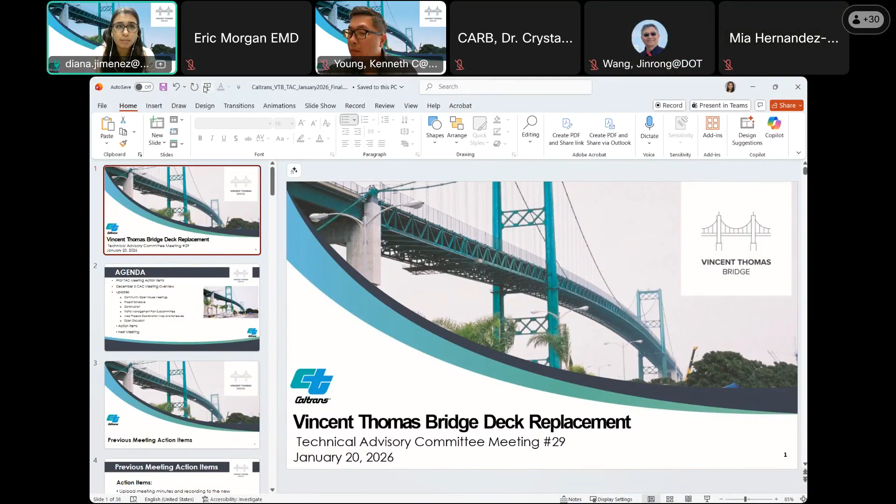There we go. Okay, so again, thank you so much for joining us on our 29th Technical Advisory Committee meeting for the Vincent Thomas Bridge Deck Replacement Project.

For today's agenda, we'll be going over the prior TAC meeting action items, the December 3rd CAC meeting overview. For the presentation, we'll talk about our community open house meetings that were postponed, project schedule, construction, our traffic management plan subcommittee, our area projects coordination map and schedules, and open discussion.

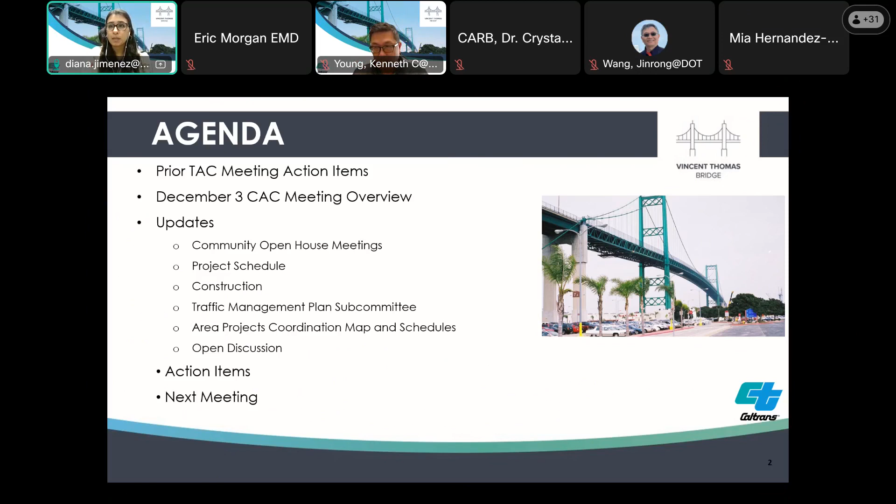So for the previous meeting action items, we uploaded our meeting minutes, written recording, and presentation to our Vincent Thomas Bridge project website, so that's available to view now.

For the prior CAC meeting, we had it on December 3rd, where we went over the CAC meeting action items from the previous CAC meeting, the November 18th TAC meeting overview. For presentation items, we discussed some upcoming closures of the Vincent Thomas Bridge, the project schedule, a recap of the October 29th Goods Movement stakeholder meeting, our project coordination map, and we discussed the location of an upcoming Vincent Thomas Bridge construction field office.

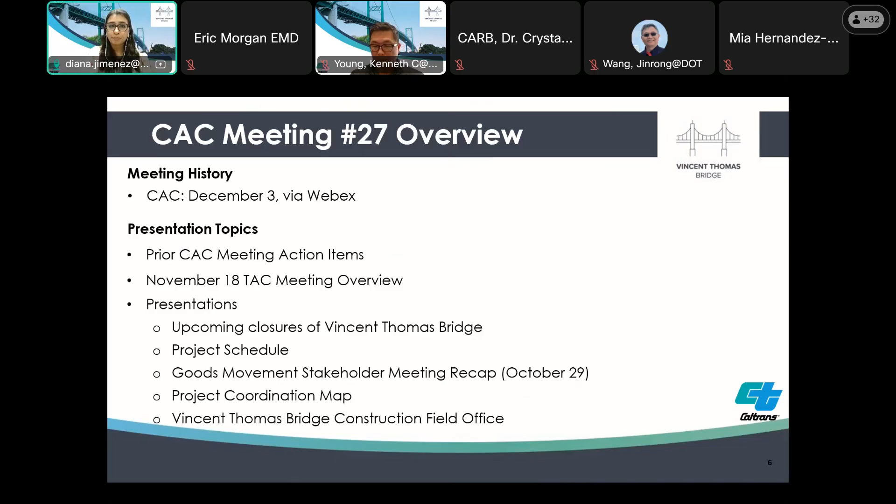And so for our first item, I know originally we had sent out a press release regarding some community open houses, 3 to be specific.

If you haven't seen our most recent press release, we had to postpone those meetings and are currently working on finalizing the new dates. Once that's ready, we'll send out another press release and post our social media updates, so stay tuned. We still plan on having one in Wilmington, San Pedro, and a virtual one, and we're coordinating with different community groups to make sure the meetings do not overlap. Thank you for your patience with that.

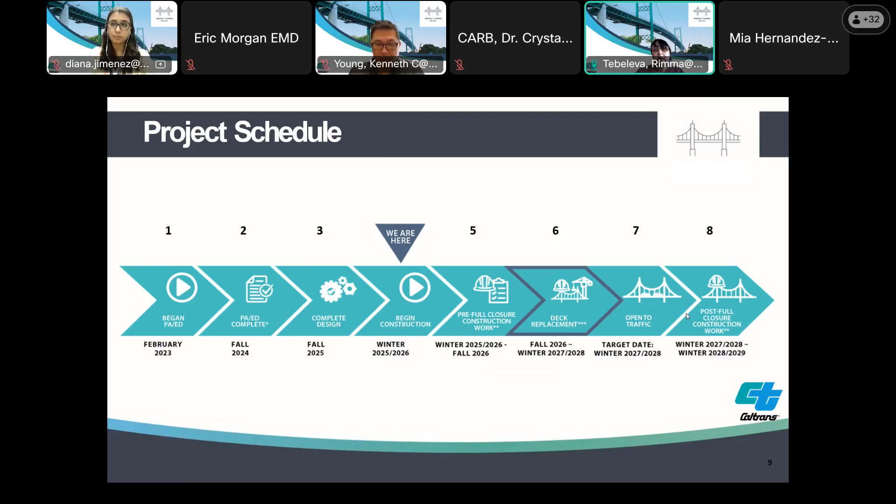All right, thank you, Rimma. This is Andy Chen from Structural Construction Caltrans. Before I start, can everybody hear me fine? Thumbs up if you can hear me.

All right, thank you. For the next few slides, I'm going to talk about what we're going to do during construction, such as how many stages, means and methods, and concept. There will be 3 stages during construction: the first is the pre-full closure stage, the second is the full closure stage, and the third is the post-full closure stage.

For the pre-full closure stage, it will start from spring 2026 to fall 2026, as the slide shows. We actually started now, and it will have overnight one-directional closures beginning in spring 2026. We haven't started yet—most likely we'll start in March this year. The closures will be Monday to Friday, only one direction per night.

For the westbound, we will close the bridge at 10:45 p.m. and open at 6:45 a.m. For the eastbound, it will be closed at 10:15 p.m. to 6:45 a.m. Of course we'll work during the daytime, but daytime work does not require closure, so during the pre-full closure we only have night closures, and potentially weekend closures as well.

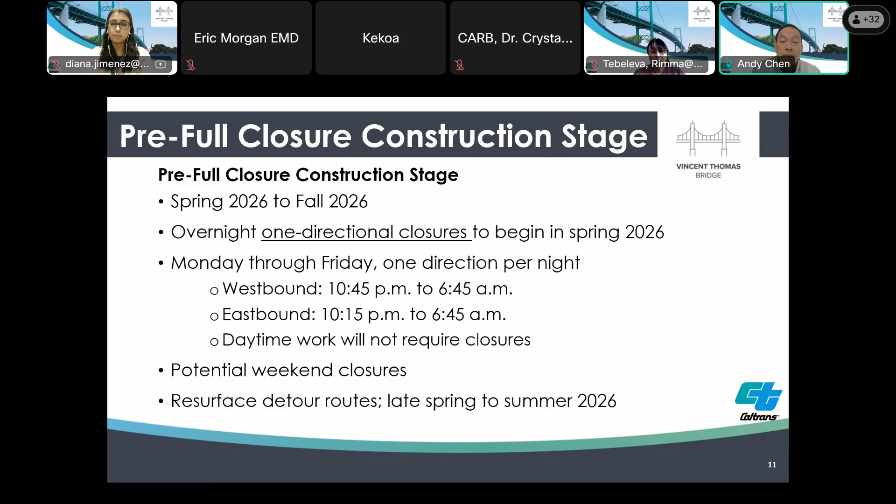And of course, during this period, we will resurface the detour route during late spring to summer 2026. All right, next slide please.

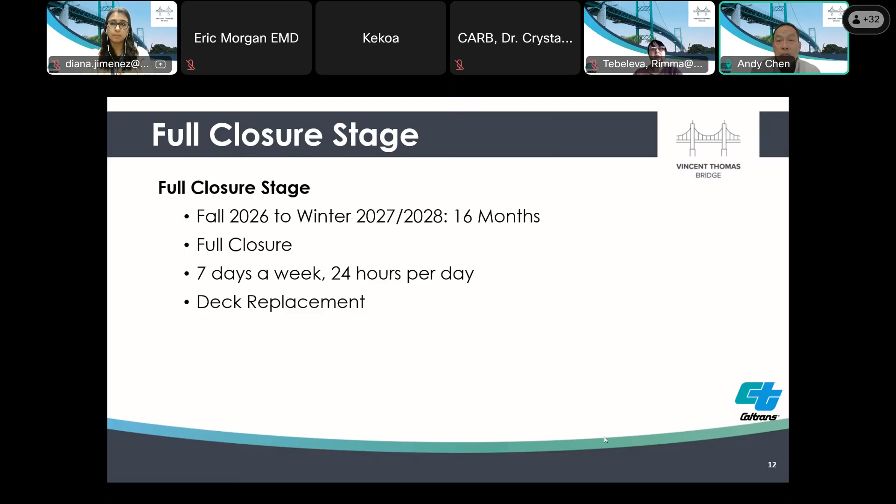This is the second stage of construction, the full closure stage. It will start from fall 2026 to winter 2027-2028, lasting 16 months. It will be a full closure, meaning the bridge will be completely closed day and night, and we will work 7 days a week, 24 hours a day. This is the stage where we actually start doing the deck replacement, removing the deck and replacing it with a new precast panel deck. Next slide please.

The last stage will be the post-full closure stage. It will start from winter 2027-2028, right after the full closure, to winter 2028-2029, taking about 12 months. During this stage, we will be doing some minor work such as utilities and punch list items.

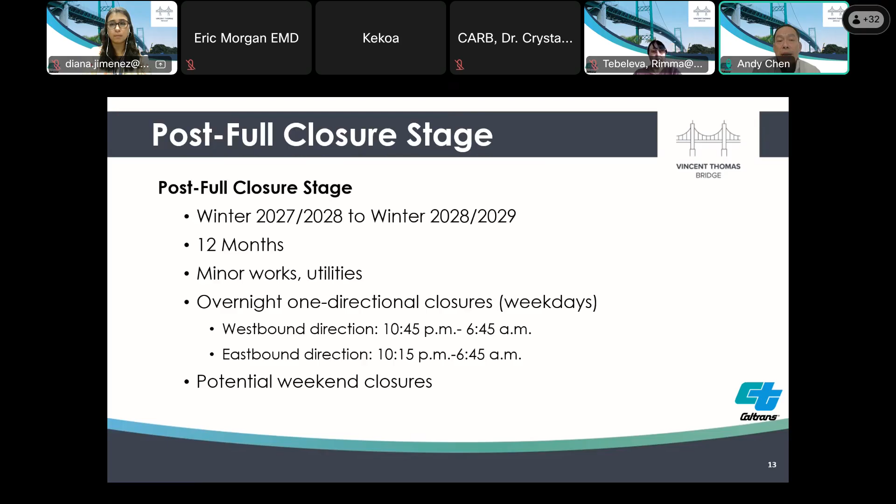During this stage, we will also need an overnight, one-directional closure every weekday, with the same closure times: westbound 10:45 p.m. to 6:45 a.m., and eastbound 10:15 p.m. to 6:45 a.m. There will also be potential weekend closures, but during this stage all the work is very minor and shouldn't have much impact. Next slide please.

So that was the 3 stages. Now we're going to talk about what we're going to do during those stages. For the pre-full closure construction, this will be preparation work—we're not just going to go on the bridge and start breaking the deck. A lot of preparation work needs to be done. For example, we're going to install temporary elevators, 2 of them, and stair towers, 2 of them, at the bridge. Those are for access, since a lot of construction has 4 crews working at the same time.

Second, we're going to install the temporary protective cover, or protective shielding. The main purpose is to protect the local residents and also businesses underneath the bridge during construction. We're also going to install the temporary access platform, which allows the worker to have immediate access underneath the bridge to do their work. And we're going to install temporary bracing on the approaches and also suspension spans to ensure the stability of the bridge during construction. And of course, during this stage, we're going to resurface the detour routes.

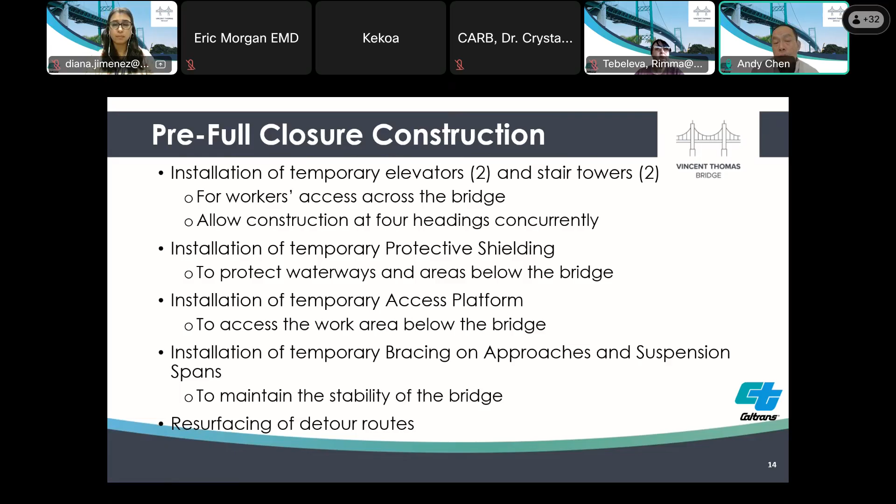Here's a picture of the temporary elevator that I mentioned earlier. This one was installed in 2011, and this time we're going to install the same one, two of them. They will be at bent 9 and bent 14 on each side of the Main Channel. These elevators are very essential for the work because they not only provide access to the bridge, but also give us space on the bridge. We all know the Vincent Thomas Bridge is a very narrow bridge, so we need all the space we can get. With those elevators, the workers can park their truck on the ground level and use the elevator to the deck, freeing up a lot of space for the work and making it much more efficient.

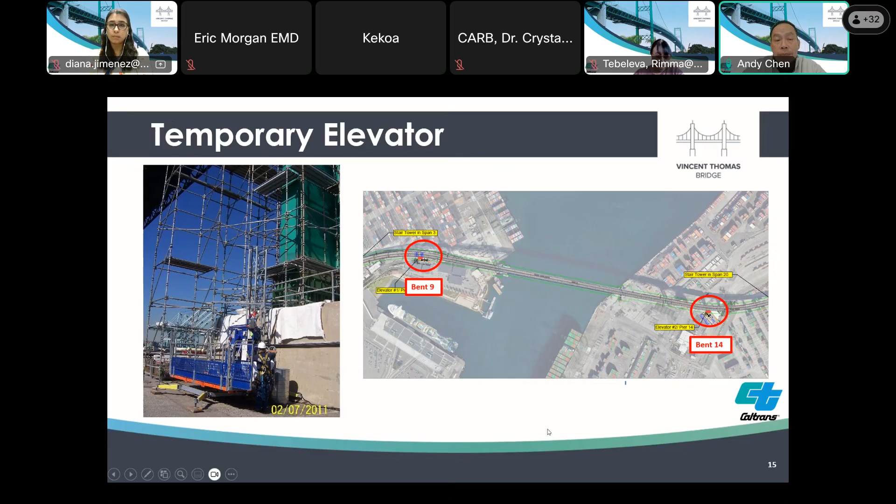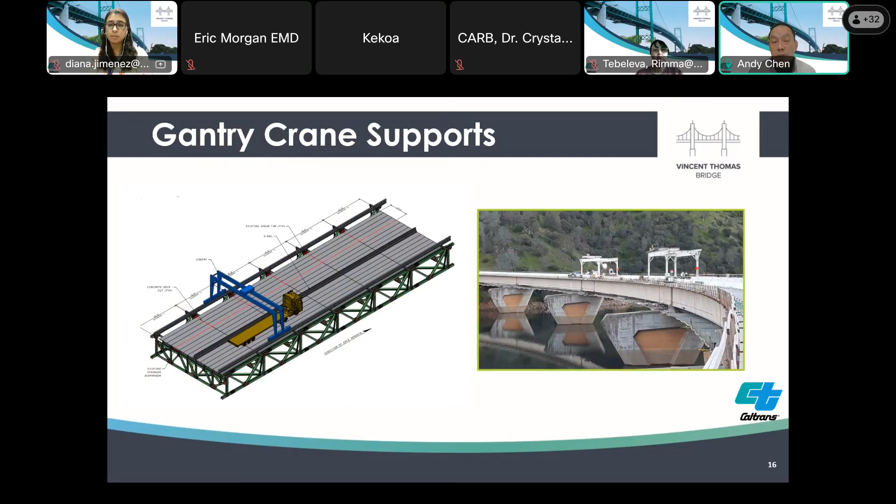Another way to maximize the space on the deck is to utilize the gantry crane. As we all know, the conventional crane is going to take up a lot of space, but as you can see on the right-hand side of the presentation, that's an example of the gantry crane. With the gantry crane, we can also free up a lot of space on the deck to ensure much more efficient work during construction.

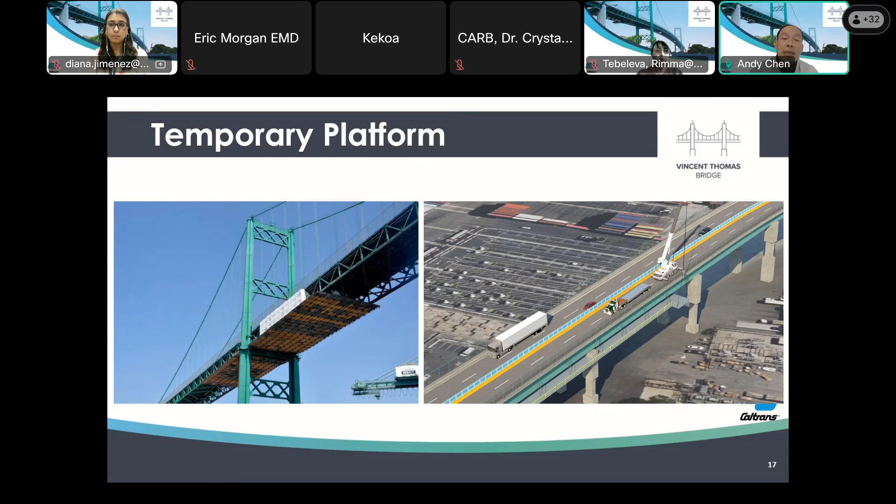Here's a picture of the temporary platform I was talking about earlier. It's a QuikDeck, and this time we're going to use the same system for the bridge, but this time we're going to cover the entire bridge with those decks. The concept is that during the pre-closure stage and during night closures, the contractor is going to assemble those platforms on top of the bridge deck. Once they reach a certain amount, we will lower the platform with the crane and hang them underneath the bridge. So this time we're going to use the same exact system as shown in the picture here.

Here's the temporary bracing I was talking about earlier. We are going to have temporary bracing on every bent to ensure the stability of the bridge during the demolition and also the deck replacement.

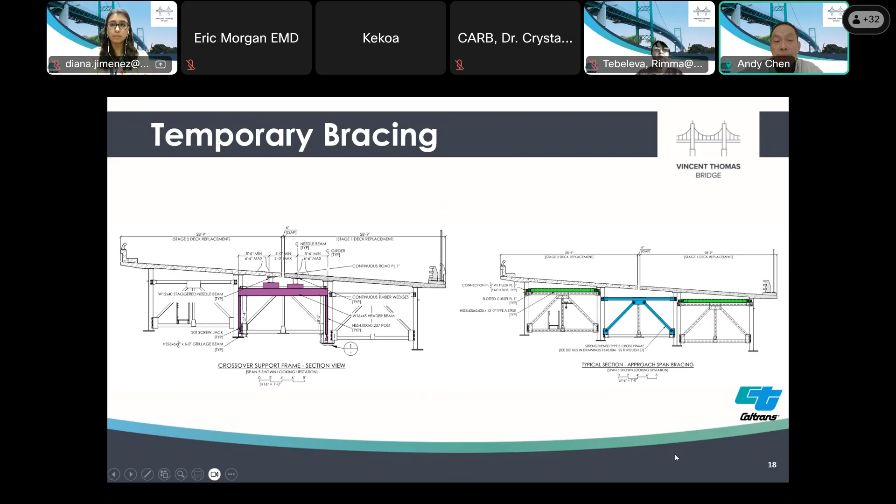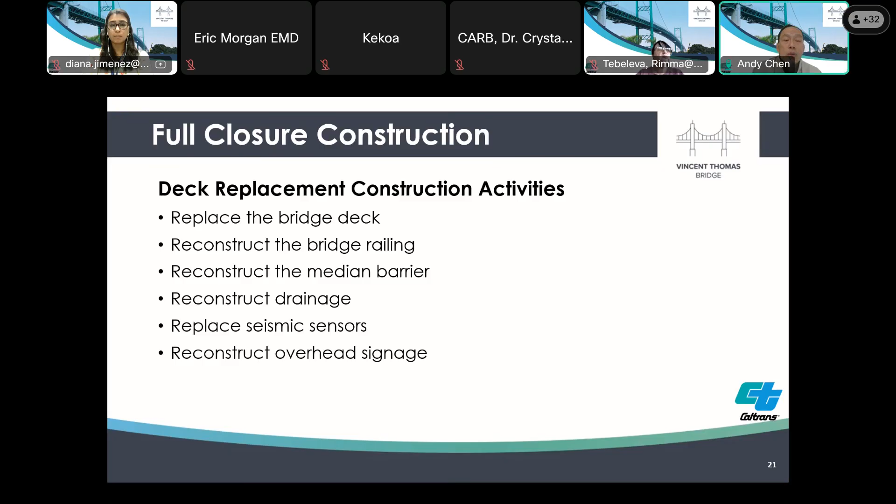So those were the works that we're going to do during the pre-closure stage. Now I'm going to the closure construction. During closure, of course, this is when the actual deck replacement happens. During this stage, we are going to replace the bridge deck, reconstruct the bridge railing, reconstruct the median barrier, reconstruct the drainage, replace the seismic sensors, and also reconstruct the overhead signs.

So for the next few slides, I'm just going to talk about the sequence: how we are going to remove and replace those decks. Blue means something we're going to put in, red means something we're going to take out during the stage. We're going to start from the eastbound first.

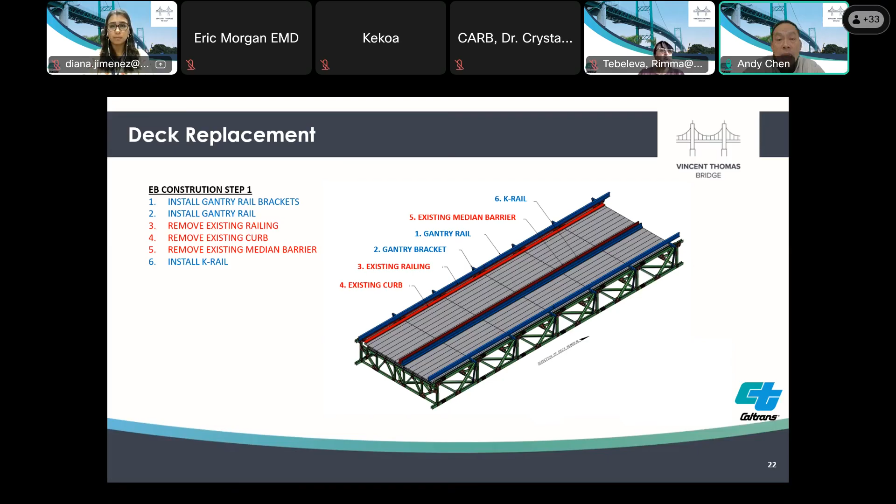Step one, we're going to install the gantry rail brackets on the side of the bridge. Second, we're going to install the gantry rail. Third, we're going to start removing the existing rail on the eastbound side, and also remove the existing curb on eastbound. Then we're going to remove the existing median barrier in the middle of the bridge, and install the K-rail to separate the eastbound and westbound. The eastbound will now become the construction zone, and westbound will become the access zone.

The next step is we're going to start cutting the deck. We are not going to use a breaker to break the deck; instead we're going to cut it and pick the pieces up one by one with a gantry crane, load them on top of a truck, and ship them out.

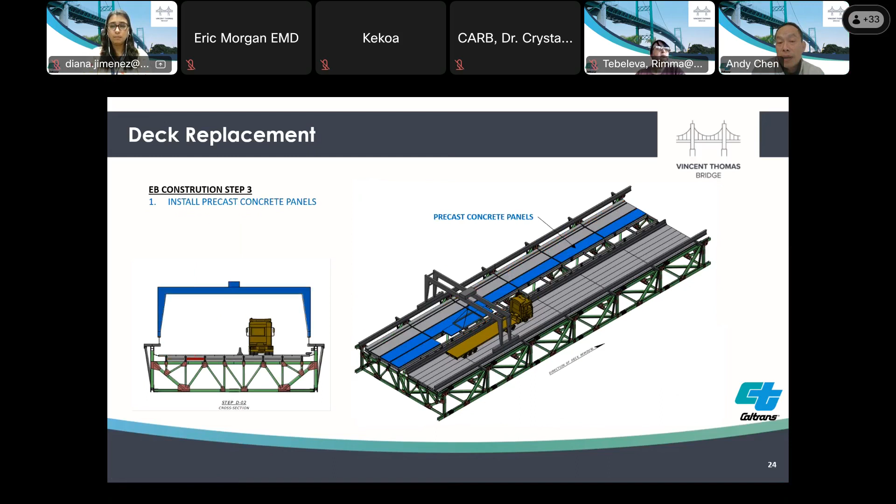So once the deck is removed, then same thing, we're gonna use the gantry crane to start placing the precast panel deck onto the bridge one by one, just as shown in the plan in the drawing here. Next slide, please.

So once all the deck is placed, then we have the new deck on the eastbound and the existing deck on the westbound, and the westbound will become our next stage. Next slide, please.

So for the next stage for the westbound, it's gonna follow the exact same steps as the eastbound. We're going to remove the rail, remove the curb, and install the barrier to separate the eastbound and westbound. And now the eastbound will be the access zone and the westbound will be the construction zone. And we're going to cut the westbound existing deck one by one and pick them out one by one by the gantry crane and ship it out by truck.

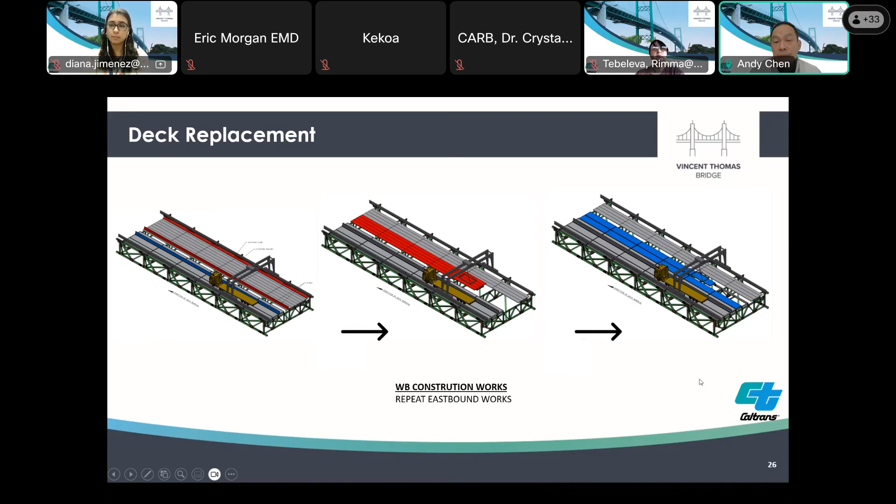And also once it's done, we're gonna place the precast panel deck one by one onto the westbound. So the steps are exactly the same as eastbound. Next slide, please. So in the end, we will have new deck in both directions. Next slide, please.

So that was the work and sequence for the full closure. Now we're gonna talk about the post-full closure construction. What are we going to do during the post-full closure? There are two types of work. One is permanent work, one is temporary work. For the permanent work, we are going to install the permanent under-deck utility supports, hang the utilities on the permanent supports, and also install the new drainage system at the seismic joints. That is for the permanent work.

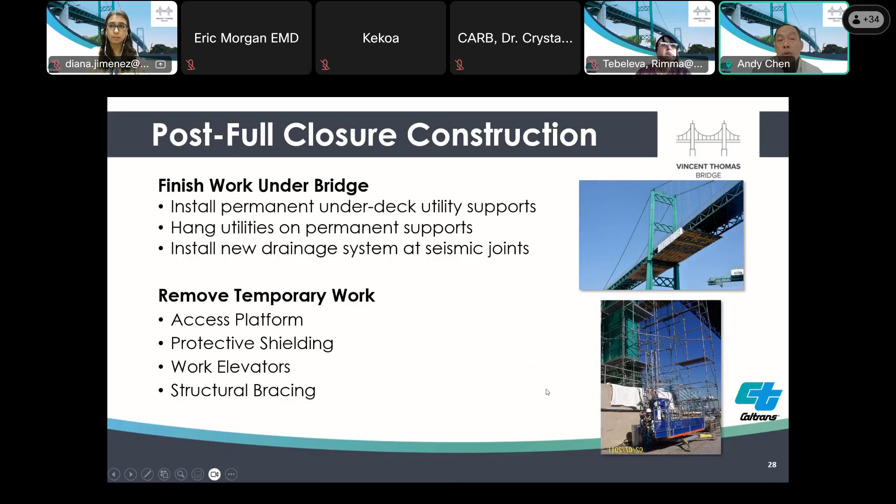And as for the temporary work, remember we installed a lot of stuff during the pre-full closure stage. We're gonna use this stage to remove them, such as the access platform that we installed in the pre-full closure stage, the protective shielding that we installed in the pre-full closure stage, and also the work elevators and those temporary bracings. So those are the work that we are going to do during the post-full closure stage. All right, next slide, please.

So this will conclude my presentation today, and I will pass the microphone back to Diana. Thank you. Thank you, Andy. Does anybody have questions for Andy before we continue?

Andy, is that part of the plan? Are you talking about that we're gonna have some kind of security gate to prevent people getting on the elevator? Yes, because when we talked about it in the beginning, on the east side, which is inside Everport, it's not that much of a concern because obviously it's a container terminal and you have to get in the terminal. But on the west side where the Catalina terminal is, we talked about having some type of security cage around the base of the elevator to prevent anyone from entering that doesn't belong there.

Right. So I'm not sure if it's gonna be the security cage, but we definitely will have some kind of security measure to prevent people from getting on there. Okay, thank you. Maybe I can add, we discussed it with contractors, so these elevators, if they will be installed, will be operated by using the card. So nobody will be able to use it without the card. And yes, they're going to have some sort of fence around it.

Thank you. Okay, so now I'm going to pass it on to Ken so he can go over the traffic management plan subcommittee. Ken? Thanks, Diana. Next slide. In terms of traffic control officers and the next slide, which is CCTV cameras, there have been no changes. We have 18 locations for traffic control officers. They are prioritized along the detour.

And amongst those locations, 5 and 6 are probably the most essential ones along Anaheim Street, Anaheim at Alameda, Anaheim at Henry Ford. That's what we have at this time. There has been some feedback from the Port of Long Beach in regard to traffic control officers and CCTVs and detours. So we will have those discussions with them on January 30th, with the goal of aligning our visions and doing what's best for this project. Next slide, please.

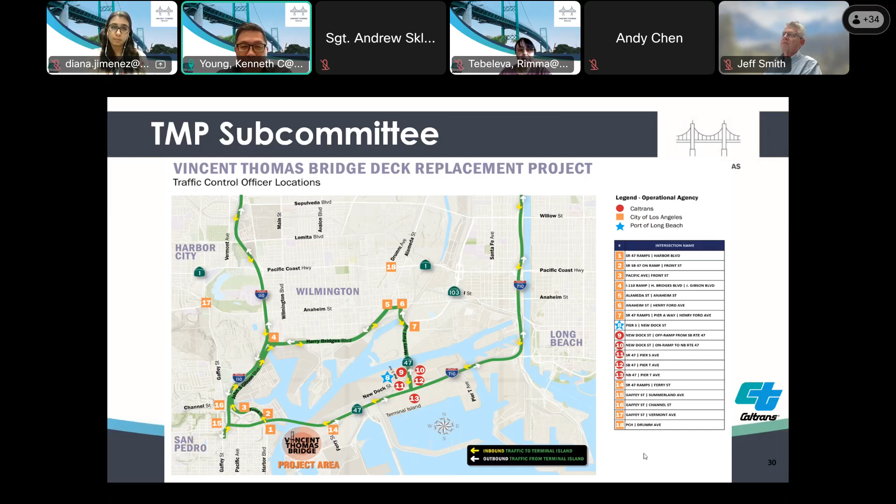As noted, we have 23 locations for CCTV cameras. In addition to these, most recently, we've added locations along the Alameda corridor. We've repositioned locations along the Anaheim Street corridor. We've added a location on the PCH corridor. So beyond the detour itself, we'll have great visibility along the Alameda, Anaheim, and PCH corridors in the absence of any traffic control officers, which again will be determined as we continue to have discussions with the Port of Long Beach next week.

And above and beyond this, we are working on enhancing the QuickMap application. The project has 2 phases. The first phase is the user interface phase, which is basically to make QuickMap itself, the software itself, more dynamic, more usable. So far, we've been meeting with our IT headquarters team bi-weekly, and we've seen a lot of progress. We're nearing the completion of phase 1 of that user interface, and we'll have user testing soon. So we will be reaching out to the stakeholders to participate in that testing.

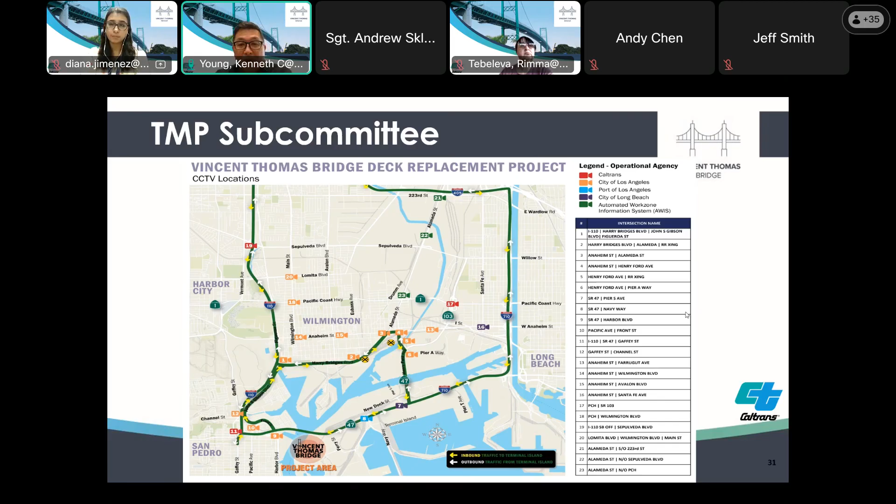Thank you, Ken. And the next meeting for the TMP subcommittee will be on the 27th. Thank you. Sure. Up next, I'll pass it on to Sume Tan to go over our area projects coordination map and schedule. Sume? Yeah, thank you, Diana. Next slide, please.

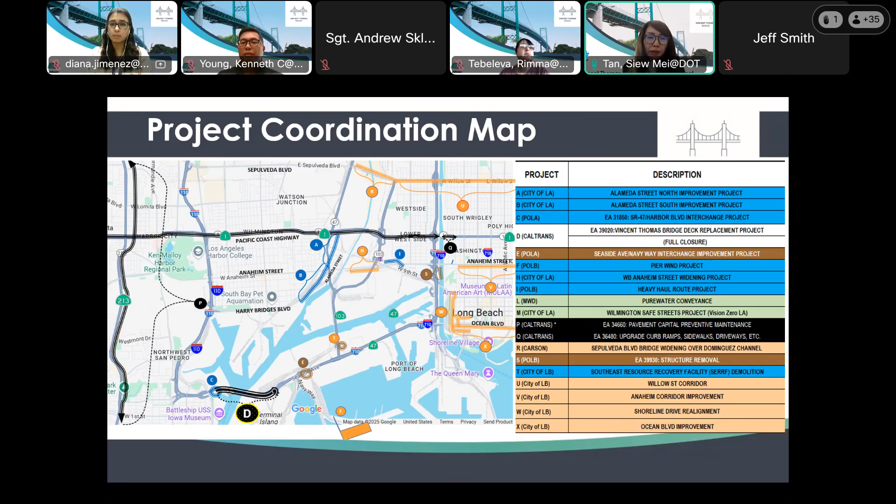So I have updated the table and the map a little bit since the last meeting. A couple of the Caltrans projects were completed, such as the Union Pacific deck replacement project and the Terminal Island Freeway pavement projects. So those were completed, so we removed them from the tracking list. And we also want to thank the partner agencies for providing updates to us in the last couple of weeks, particularly Port of LA. I think the SR 47 and Harbor Boulevard Interchange project was also completed. I think that's project C. And I think those are the only updates we received in the last couple of weeks.

If anybody has more updates or additional information to share with us, that will be great, especially City of Long Beach projects U, V, W, X. Those are not along the detour routes, but they are in the vicinity of Vincent Thomas Bridge. So if the city has more information as to closure or schedule updates, please share with us. But as you can see from the list, we are actually making good progress in coordination. We have eliminated projects that would have a direct conflict in schedule or along the detour route.

So we'll continue to coordinate closely with the agencies, especially for project E, the Seaside Avenue Navy Way Interchange project. That one's schedule will be in conflict with the Vincent Thomas Bridge full closure. But at this point, we do not anticipate any major impact on the detour and traffic, but we'll continue to work with POLA on that. And I think that's all I have. If anybody has questions or updates, please share. If not, Diana, that's the wrap for me. Thank you, Siew Mei.

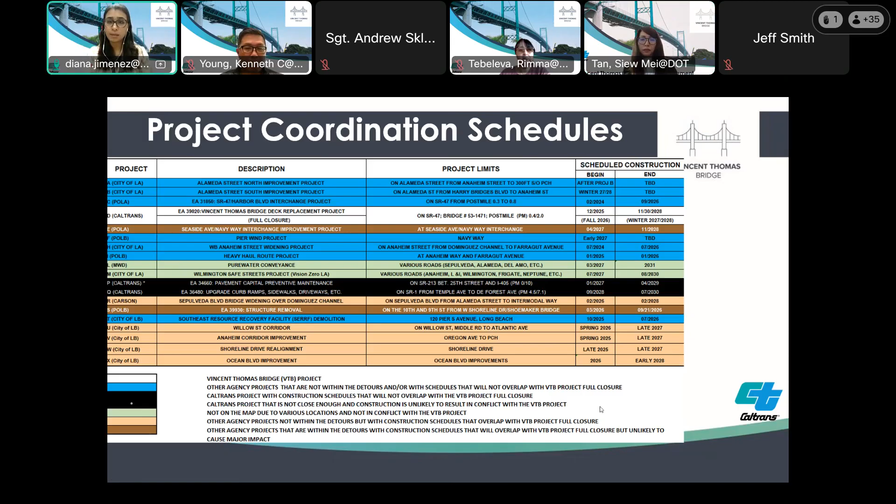Okay, so we've reached the end of our presentation. We've made it to open discussion. So if you have any questions or comments, it's the time to ask. Does anybody have any questions? I see Ray's hand. Ray? Yeah, thank you.

One thing I have gotten some feedback on from the community, although there's not much community around the bridge construction, but those people who feel that they are close: will there be any sizable or measurable noise coming from any part of the construction? I don't think we've ever really focused on that and how we're going to be able to measure that. Rimma, do we expect there to be noise during the construction?

Or Andy? Yeah, we should have some noise when we remove the slabs. We're going to have to use jackhammers also, so this will probably be a source of noise. But the nearest locations, like residential, are probably kind of far away from really hearing that noise, and we still have noise specs in the contract that the contractor will have to abide by.